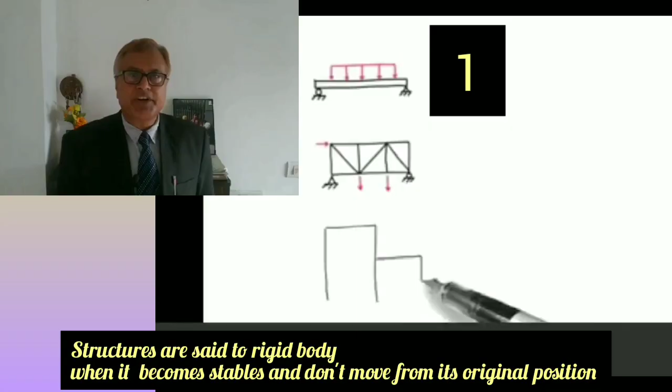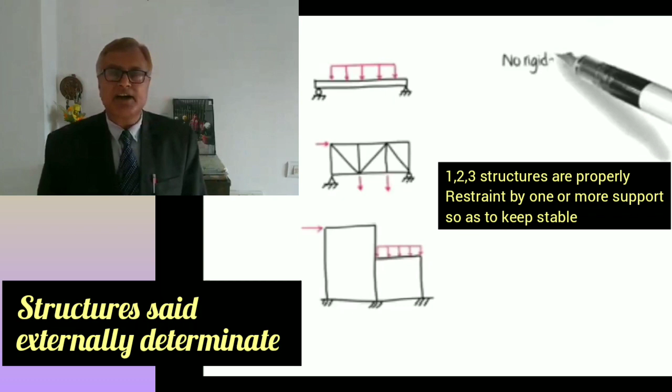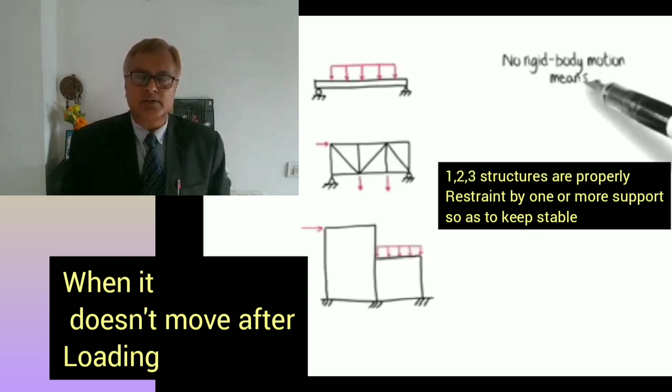Please observe serial 1, 2, 3. This structure is said to be an externally determinate structure, because its support conditions—roller support and hinge support—are given in such a way that it does not move, and this can be solved with the equations of equilibrium only.

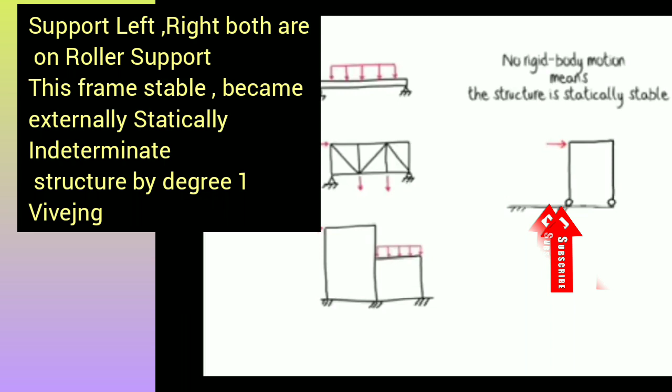Now see the frame. If you apply a load from left to right, horizontal load, it will start moving. Why does this happen? Because both support 1 and support 2 have roller supports, so we only get 2 support reactions which are vertical, but you should have a minimum of 3 numbers of support reactions externally so that it becomes stable and statically determinate.

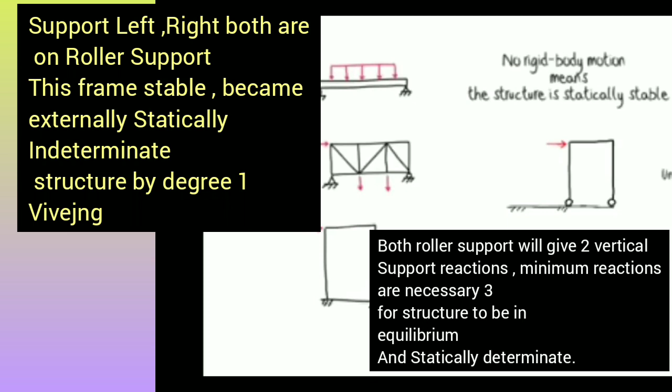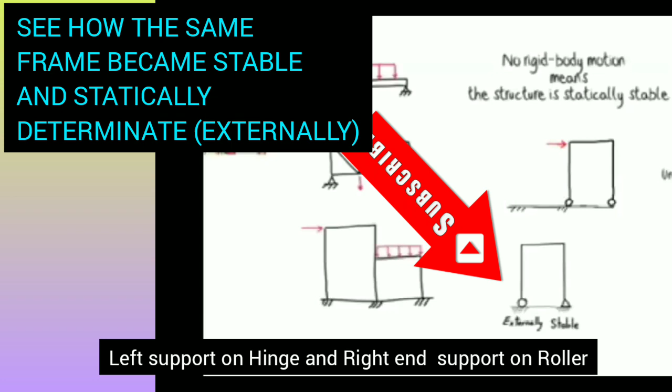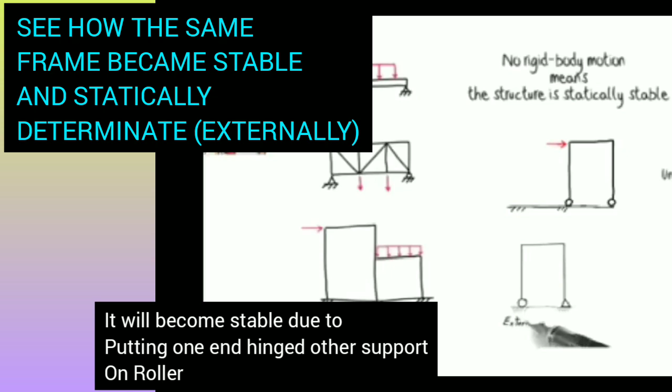Now let us put on the same frame a hinge support on the left hand and a roller support on the right hand. Then it will become a statically determinate structure externally. Why? Because the hinge support has 2 numbers of reactions, one horizontal and one vertical, and the roller support has 1 number of reaction which is vertical. So the total number of reactions becomes 3, and the number of equilibrium equations is also 3. So this structure becomes a statically determinate structure.

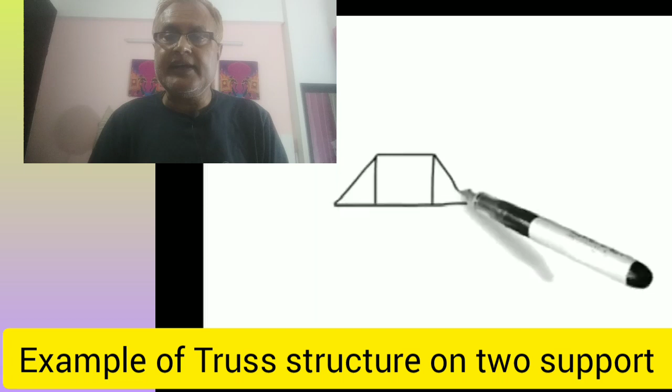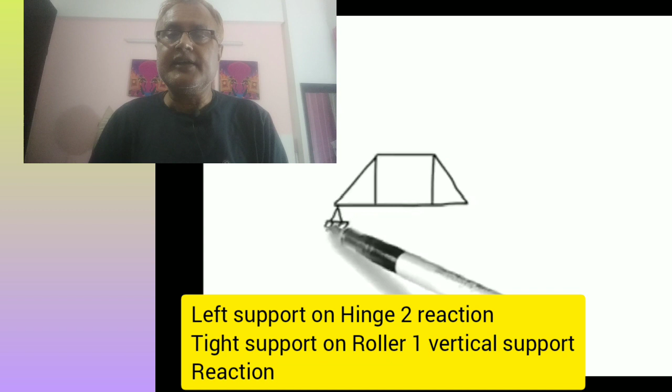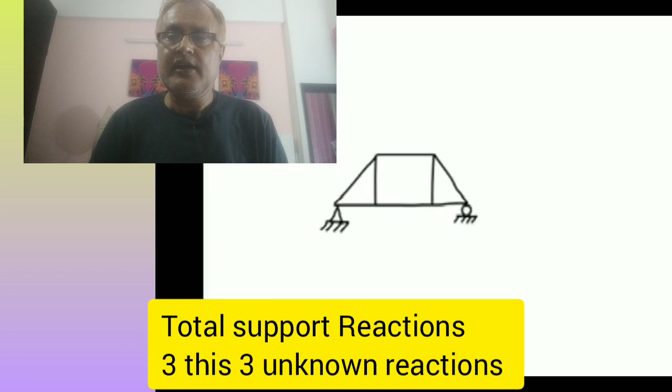a truss-like frame, left support pinned and right support on a roller. Due to these support reactions, the total number of reactions is 3—for hinge or pin, 2, and for roller, 1 support. The total number of unknown reactions at the supports is 3. You may easily get the 3 unknown support reactions by applying the 3 equations of equilibrium. The structure is externally determinate.

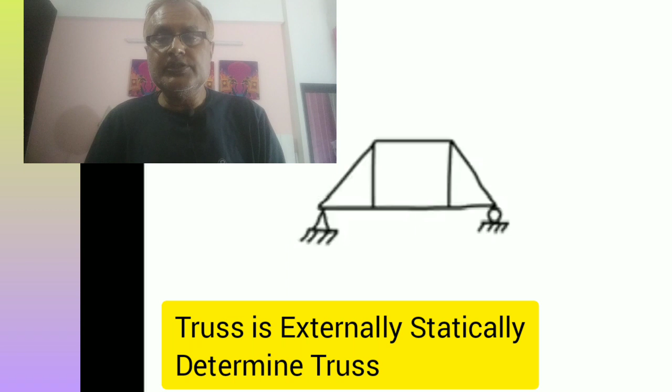Since its degree is 0, number of reactions 3 minus 3 gives 0, but the structure is still deficient due to localized movement of some forces.

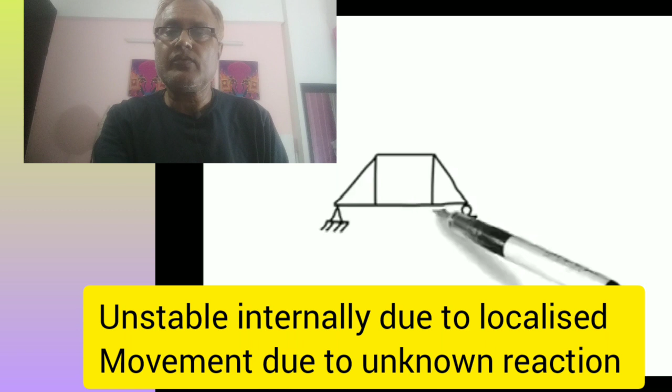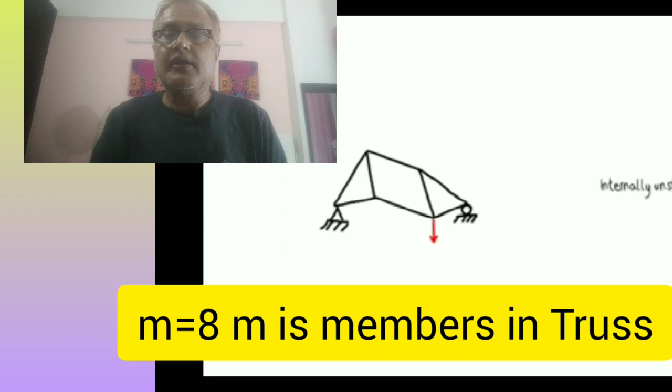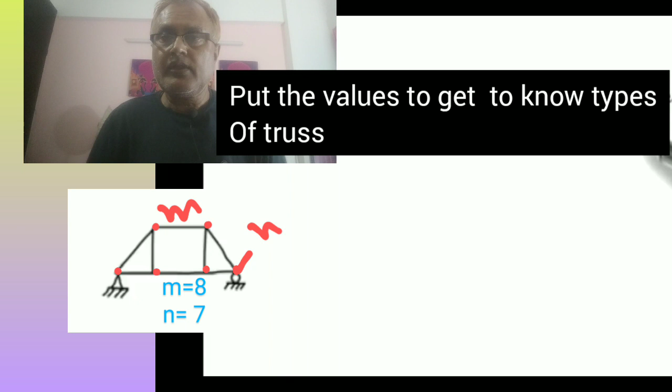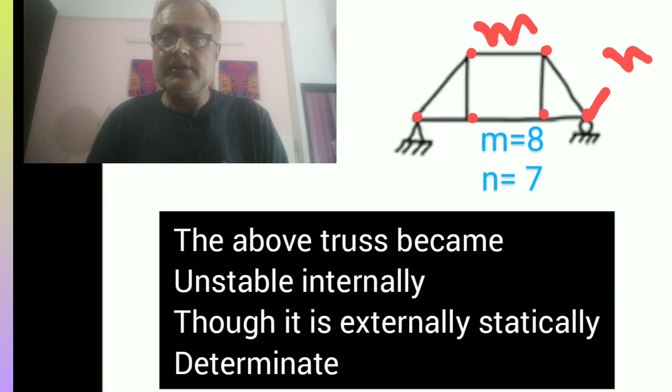This is due to fewer members than required. In this frame truss, you will find the number of members M is not equal to 2n minus 3. The member count being less than 2n minus 3 is a condition for an unstable truss. M is the number of members and n is the number of joints. Put in the value, and you will find that the number of members internally is less than 2 times the number of joints minus 3. So M is not equal to 2n minus 3, and the structure internally becomes an unstable truss.

I am going to put more examples for you for a better concept.

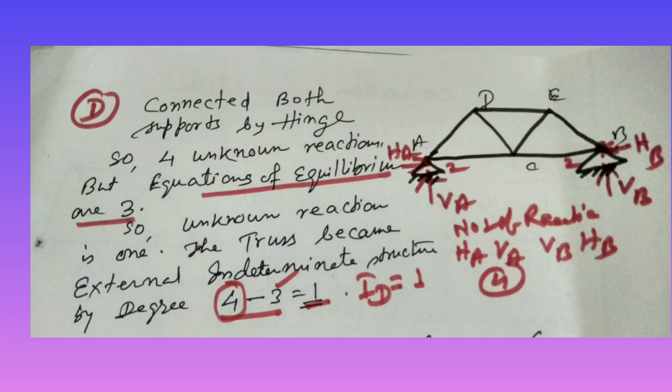Let's see another example. This is also a truss where you will see the left support is at a hinge and the right support is also at a hinge. So the total number of support reactions, horizontal and vertical combined, becomes 4. You know that the number of equilibrium equations is 3. So 4 minus 3 equals 1. You get statically indeterminacy externally by degree 1, so the unknown support reaction is 1 and it is a statically indeterminate structure.

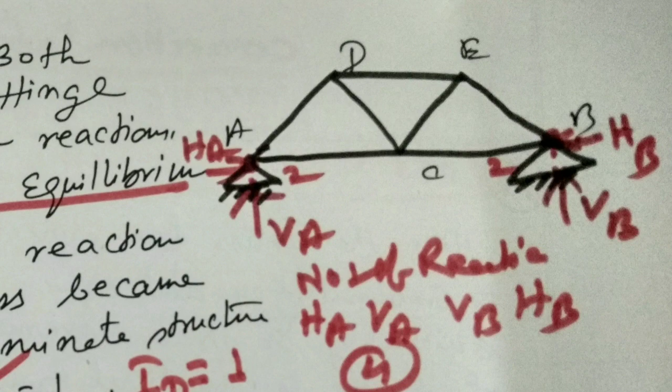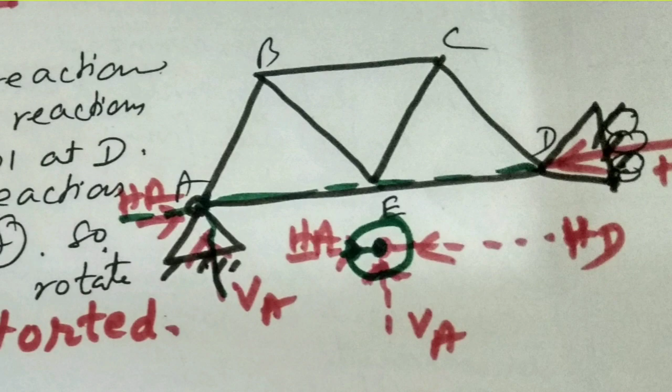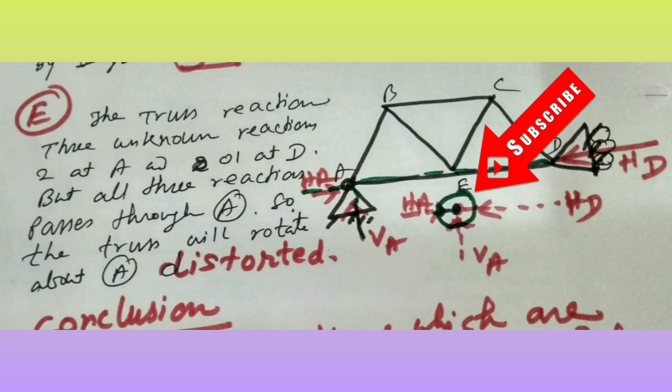Now another example. Here is support A, a hinge support, with two reactions HA and VA. And again at support D, see the line of action of forces, only one horizontal reaction HD. This truss is unstable and distorted. Why? Because the lines of action of HA, VA and HD are coinciding at one point, as you have seen in the picture.

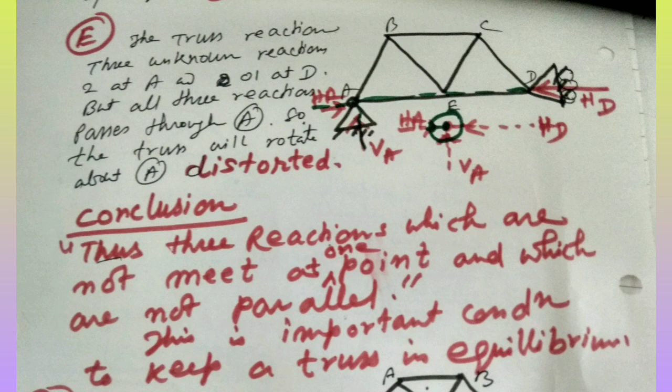So the structure becomes unstable. In conclusion, please note that for a truss to be in equilibrium, the three reactions must not meet at one point and must not be parallel—this is the important condition. The lines of action of your supports should never coincide at one point. The structure becomes distorted if all lines of action coincide at a point. In this condition, the whole truss becomes unstable and rotates about point A.

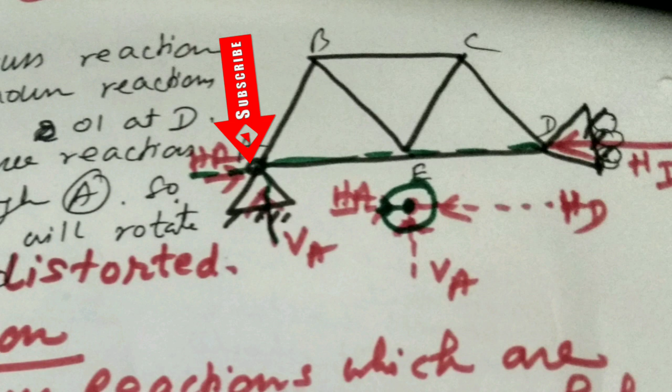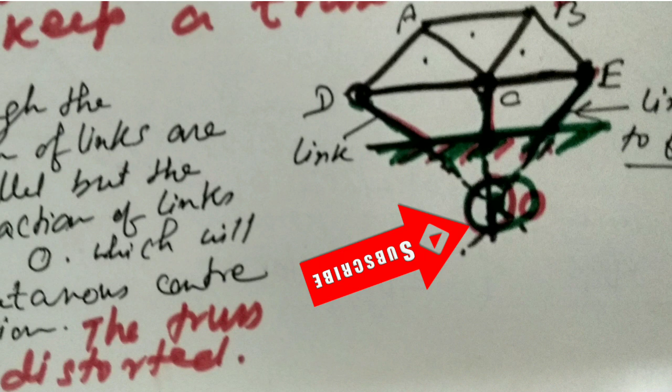Please see one more example in truss stability. This truss is fixed at ground level. You will see that its links, though not parallel, have lines of action that meet at one point, as shown in this picture, coinciding at one point. In this case, this point becomes the center of rotation and the truss is distorted and becomes unstable.